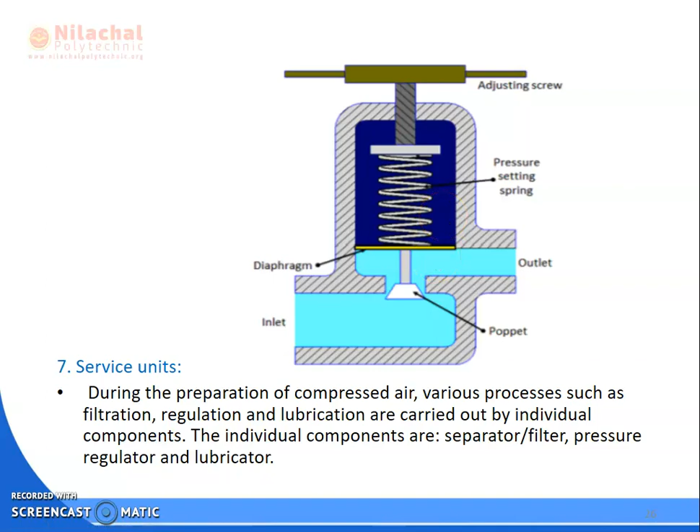The diaphragm and poppet will move down, the air will be added, and it will manage the outlet pressure. If the outlet pressure is more than 10 bar, the excess pressure cannot be sent to the system, so it will be vented away. The diaphragm and the poppet will move upward, and the air pressure will be vented away. So that is the function of the pressure regulating valve, the non-relief type, and this one is the relief valve type. Next we will discuss your air lubricator.

The compressed air which is generated should be dry and free from oil, that we know, and for some components lubricated air is damaging, and for others it is undesirable, but for the power components it may in certain cases be necessary. The lubrication of the compressed air should therefore always be limited to the plant sections which require lubrication. For this purpose, mist lubricators are fitted to feed the compressed air with a specially selected oil.

As we know, the oil and the water vapor will be removed by the coalescing filter. Since valves are used here, they must be lubricated. So which lubrication system is it? The mist lubricator is used, with specially selected oil. The oil which is introduced into the air from the compressor is not suitable for the lubrication of the control system components.

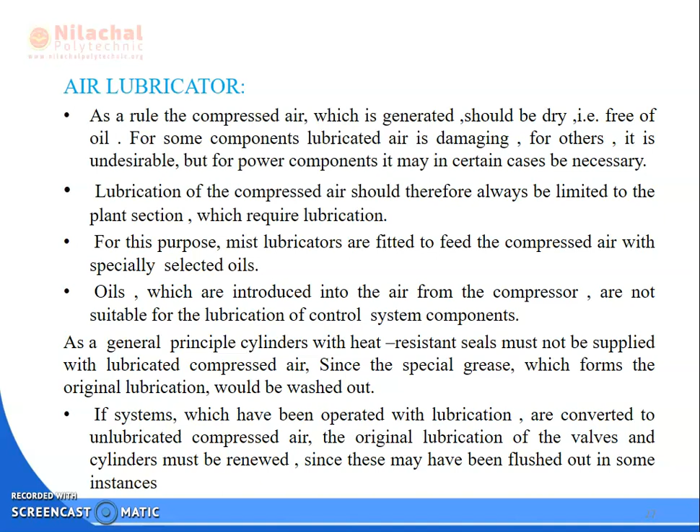As a general principle, cylinders with heat resistant seals must not be supplied with lubricated compressed air, since the special grease which forms the original lubrication would be washed out. If systems which have been operated with lubrication are converted to unlubricated compressed air, the original lubrication of the valves and cylinders must be renewed, since it may have been washed out in some instances.

So what are the main problems that occur if excessive lubrication is used? Malfunction of components, increased environmental problems, and seizing of components after prolonged downtime. What is the operation of the mist lubricator? The compressed air inlet you can see here, this one is your outlet, here the oil droplets, this one is your siphon tube and oil reservoir. Here the oil will be in mist form. This is the glass bowl, and air will flow.

So what will happen? The compressed air passing through the lubricator causes a pressure drop between the oil reservoir and the upper part of the lubricator. Then due to the pressure difference, what will happen?

From the oil reservoir, the oil will move upward through the duct, that is the siphon tube, where it is then dripped into the nozzle, which can be seen through the inspection glass. And here the oil is atomized, and this is known as a mist, and taken up by the air stream to a greater or less extent.

As the inlet compressed air passes through the lubricator, it causes a pressure drop between the oil reservoir and the upper part of the lubricator. So what will happen? From the oil reservoir, the oil will be passed through the siphon tube and sent to the nozzle, where the oil will be formed in the atomized form and taken up by the air stream to a greater or less extent, then it will be outlet. Thus, the oil carried with compressed air into the system helps to lubricate the system components.

Clear? So this is the function of the what? Lubricator. So what you can see here: filter, regulator and lubricator. This FRL unit will be used for filtration, regulating and lubricating of the compressed air. Okay. So this FRL unit, the trio, is used in all the pneumatic system.

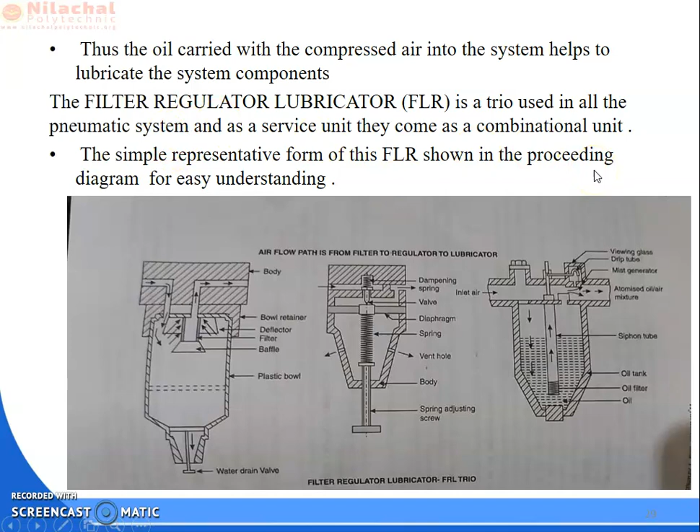Then we will discuss about actuators. We are discussing single acting actuator and double acting. In the single acting, there is only one entrance that allows the compressed air to flow through, and therefore it can only produce thrust in one direction. And the piston rod is propelled in the opposite direction by an internal spring.

So when there is only one inlet or one entrance, when the air enters this side, the piston will move forward or produce the thrust in one direction, the right hand direction, and then it will be moved back to the original position. How will it be moved back? By the internal spring force and by the external force provided by the mechanical movement of the body. Single acting cylinders are used in stamping, printing and moving material, etc.

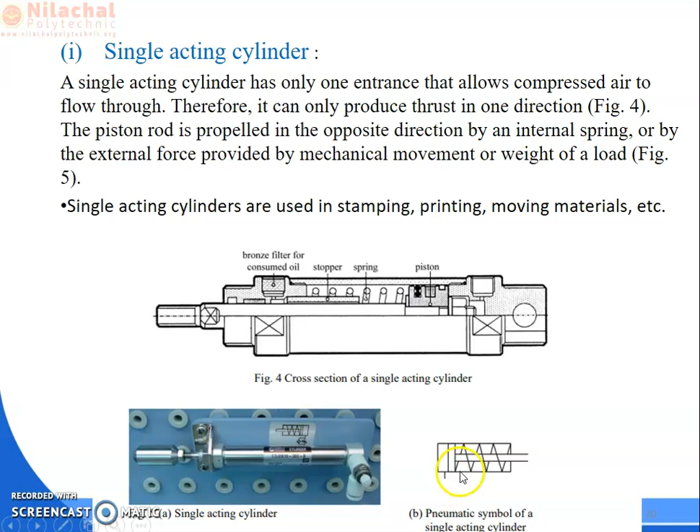So you can see this is the pneumatic symbol of the single acting cylinder. This is the inlet, one direction inlet port or one entrance. The spring is used so it will be returned to the original position.

Then is the double acting. In the double acting cylinder, the air pressure is applied alternatively to the relative surface of the piston, producing a propelling force and a retracting force. As the effective area of the piston is very small, the thrust produced during the retraction is relatively weak, and the tubes of the double acting cylinder are usually made of steel, and the working surfaces are also polished and coated with chromium for reduction of friction.

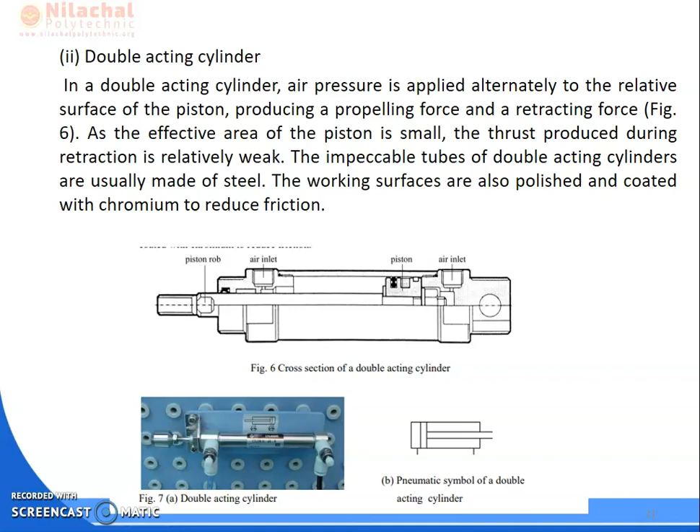So as the pneumatic cylinder, this is the double acting cylinder. There are two inlets, two entrances where the air will be inlet to the cylinder. Okay. So if the air is inlet from the left, then it will move forward. To come back or to retract, air should be passed through the right hand side. When it retracts, the force or thrust produced is very weak, as the piston area is very small. So this is the double acting cylinder.

Then we will discuss about what? Pneumatic valves. So first we discussed the intake filter, then the compressor, the intercooler between the compressors, then the aftercooler, then the intake filter. In the intake filter we discussed the standard filter, coalescing filter and vapor absorbing filter. Then we discussed the pressure regulator, relieving and non-relieving. Then we discussed the lubricator.

Now, after this, the air will be passed through the valve to actuate or run the actuator. So what is the valve? A valve is a device which is used to control the output of the circuit. The main purpose of the valve in the pneumatic or hydraulic circuit is to control the final output. And valves are divided into a number of groups according to what they control.

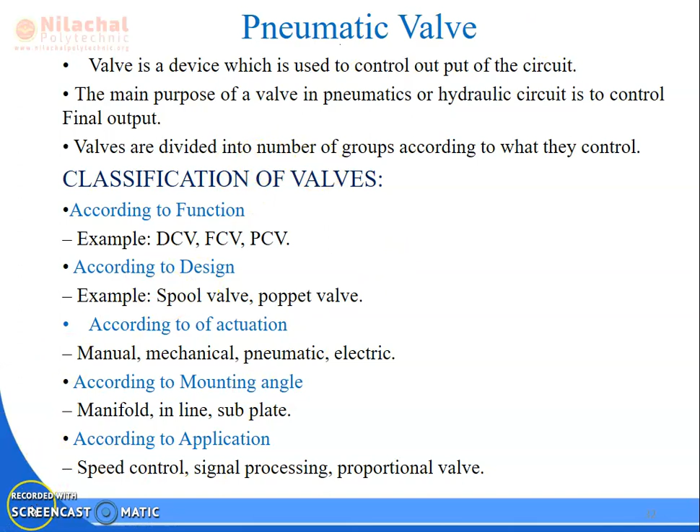According to the function, examples are the direction control valve, DCV, FCV and PCV. According to the design, spool type and poppet type. According to the actuation, manual, mechanical, pneumatic, electric or solenoid type. According to the mounting, manifold, inline, sub plate. And according to the application, speed control, signal processing and proportional valves are used. So these are the classifications of the valve. Next we will discuss the directional control valve.